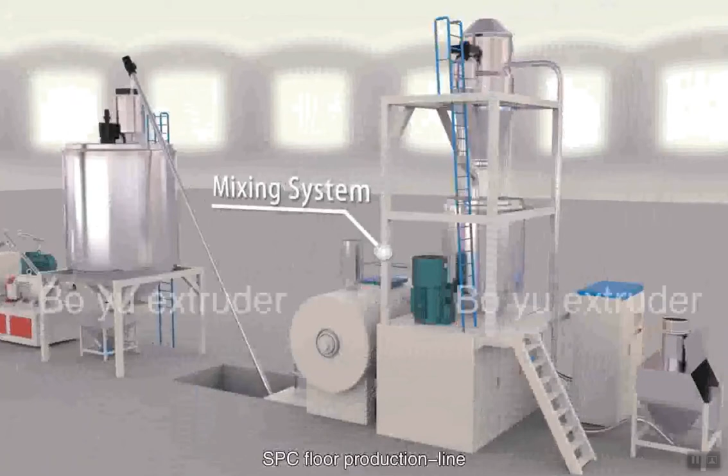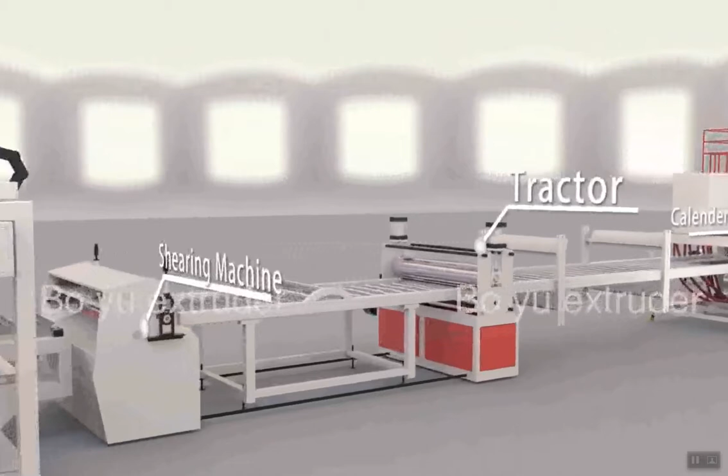This is an introduction to the SPC floor production line. It consists of 6 parts: mixing system, extrusion system, calendering system, tractor, shearing machine, and automatic plating machine.

Mixing system. The first step is feeding. The raw materials are put into the mixer in proportion to the formula. Other processing aids need to be measured separately and mixed together, then put into the feeding station and sucked into a feeding tank by vacuum feeder.

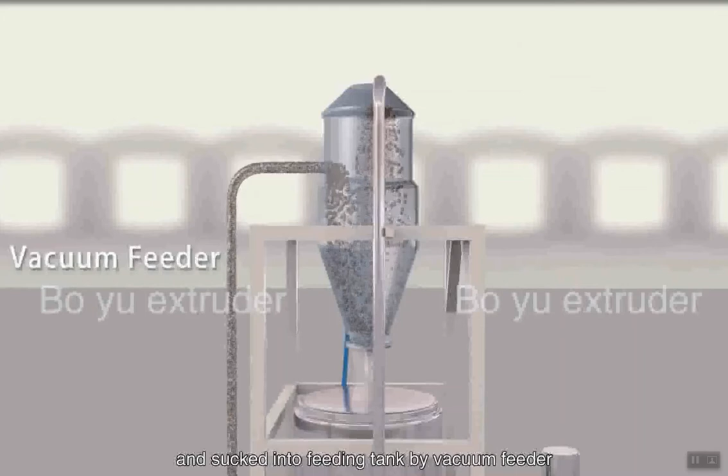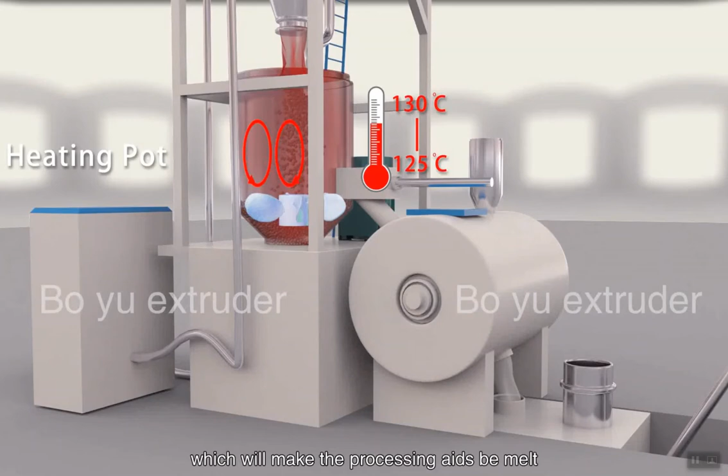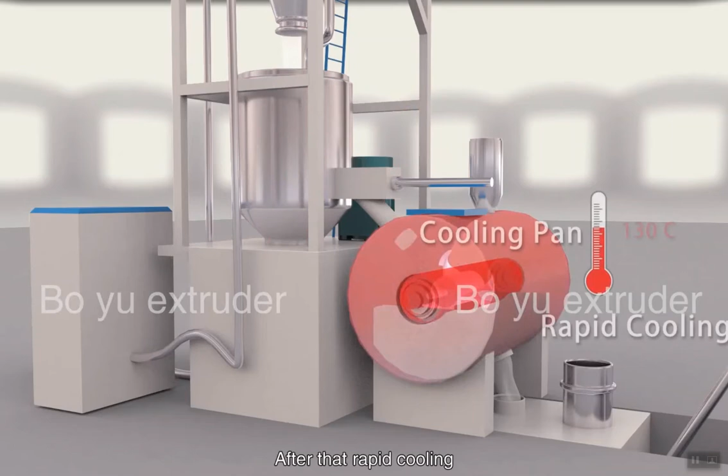Subsequently, the principle of heating up by friction is used to mix the raw materials at high speed and raise the temperature from 125 degrees centigrade to 130 degrees centigrade, which will make the processing aids be melted and the water vapor be removed from the raw materials, so that the raw materials can meet the requirements of use. After that, rapid cooling is carried out to prevent any occurrence of problems, such as plasticizing in advance or volatilization decomposition of processing aids.

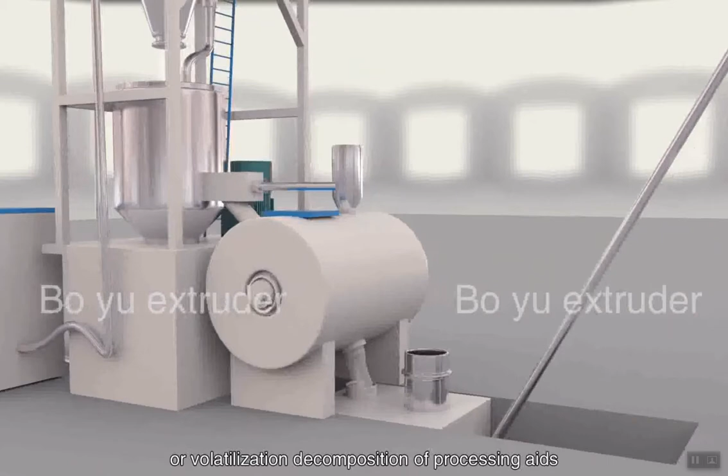The materials discharged from the cooling pan are fed into the screw barrel by screw feeder at a constant speed, while double screw feeding can avoid the influence of the start-stop of the feeder on the stability of the feeding process. Extrusion system: after entering the screw barrel, the materials are plasticized by heated rolling.

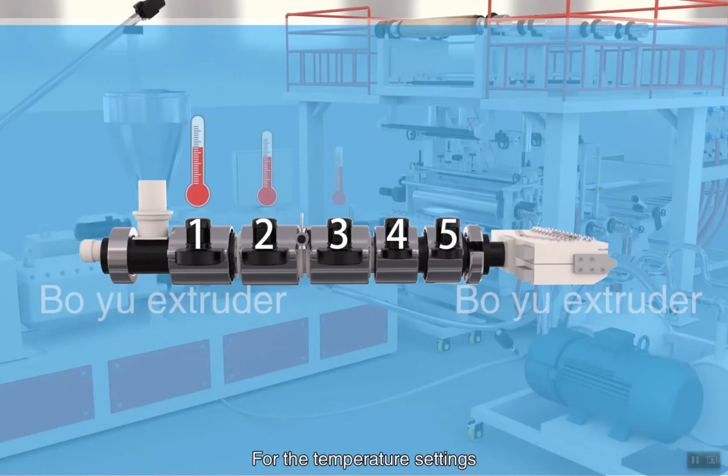In this process, temperature control is the most critical link. The temperature control of Boyu SPC floor production line is divided into 5 zones. For the temperature settings, it is gradually increased from Zone 1 with initial temperature of 190 degrees centigrade to 220 degrees centigrade at Zone 5.

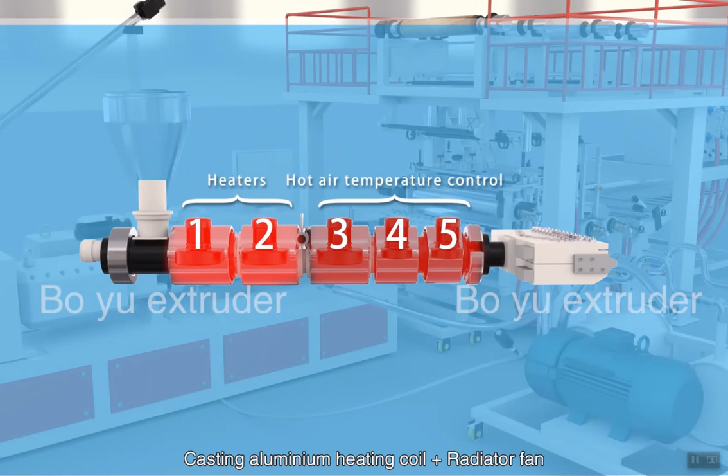For hardware, Zone 1 and Zone 2 adopt heating coils. In the other heating zones, cast aluminum heating coil metals plus radiator fan are used to control the temperature. For software, a temperature control module plus relay board is used to complete the heating or heat dissipation output, which combines with high precision thermocouple for temperature measurement, so as to realize precise control of the temperature.

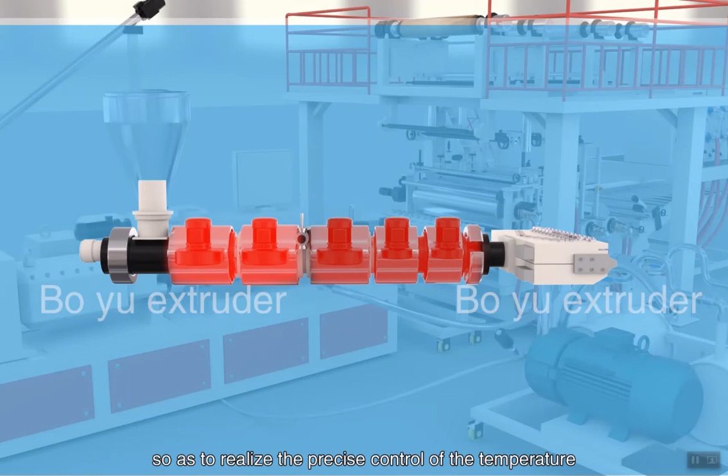After the completion of plasticizing, the materials will be extruded and then pushed to the tooling by strong back pressure. The tooling size is determined by product specifications.

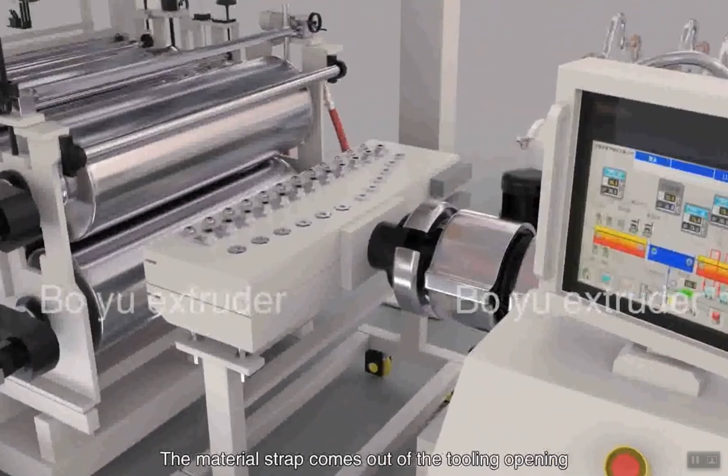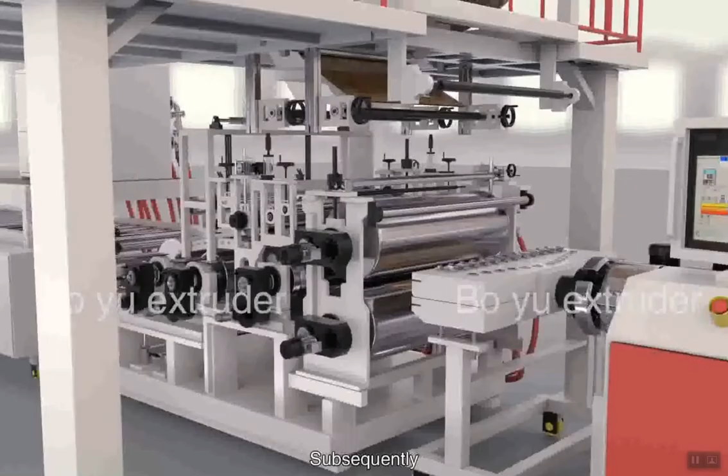Calendering system: the material strip comes out of the tooling opening and then into the 5-roller calendering system. Firstly, it is rolled by number 1 roller and number 2 roller to ensure that the thickness is uniform and up to standard. Subsequently, the wear-resistant coating and color film are closely fitted by the temperature of the material strip itself and the heating of number 3 roller.

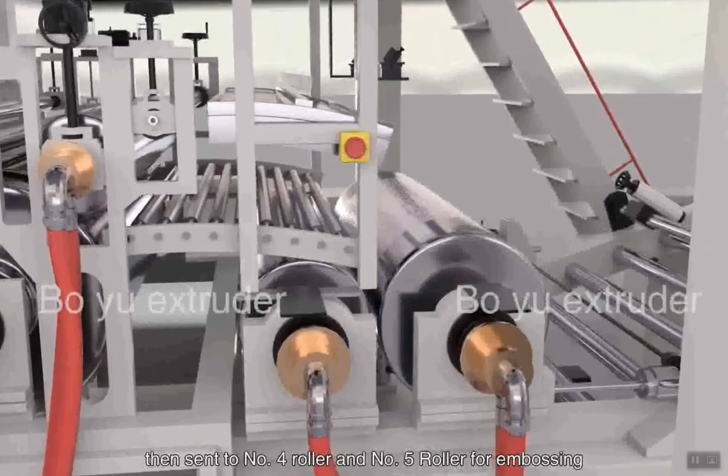Then, it is sent to number 4 roller and number 5 roller for embossing. Number 4 roller is made of silicone rubber, which will make the embossing texture clear by using the method of cold pressing. The stability of color film and wetting is key to the rate of final products.

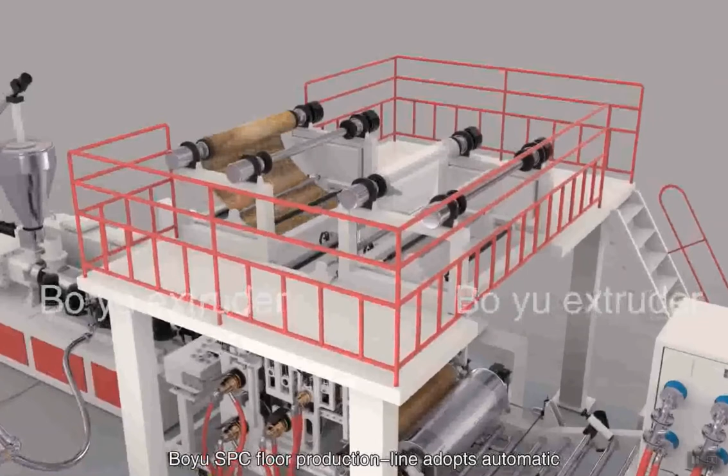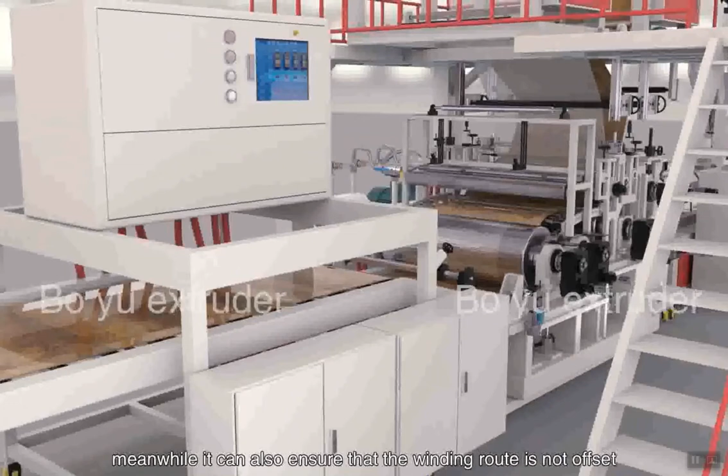Boyu SPC floor production line adopts an automatic constant tension control system for output, so as to ensure the stability of color film and wetting. Meanwhile, it can also ensure that the winding route is not offset by using the automatic correction program. The synchronous registration system combines a high-speed operation module with an emerging alignment system to make the surface embossing coincide with the color film pattern, so as to achieve the precise alignment effect of synchronous registration.

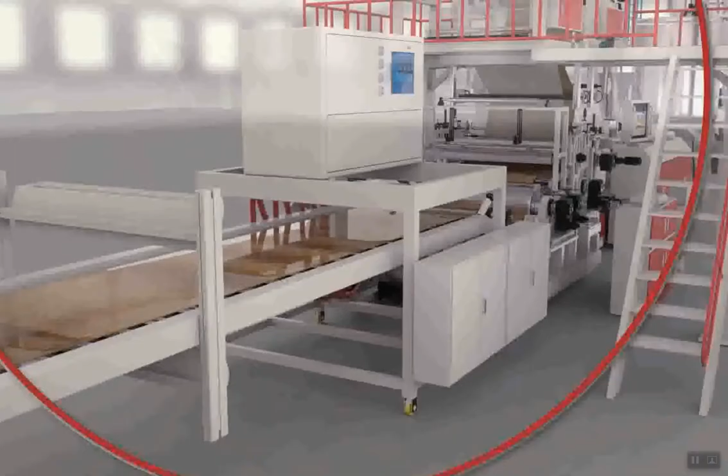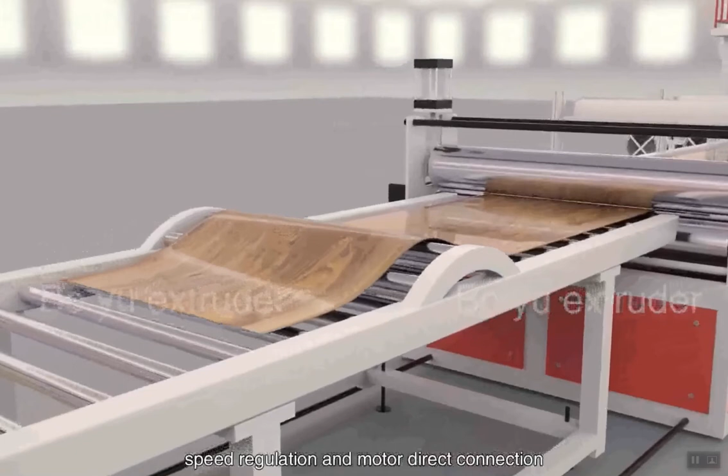Tractor: the tractor of the Boyu SPC floor production line adopts the structure of frequency conversion, speed regulation, and motor direct connection, which can match the production line speed perfectly.

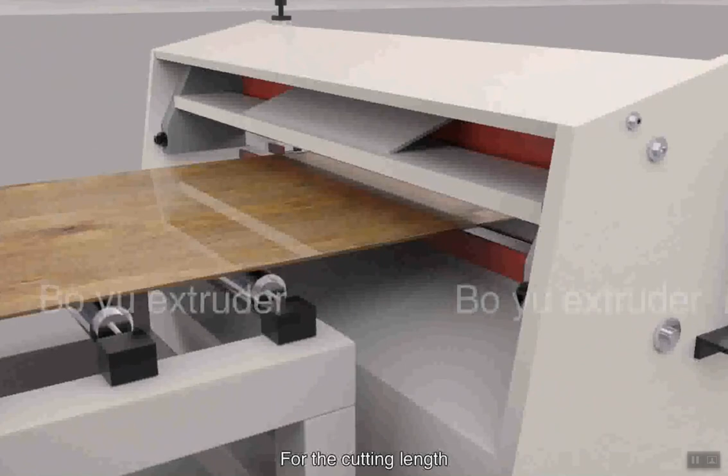Shearing machine: the material strip is transported to the shearing machine by the tractor for cross-cutting. For the cutting length, the signal is transmitted by a photoelectric switch, so that the response can be sensitive and the length can be accurate.

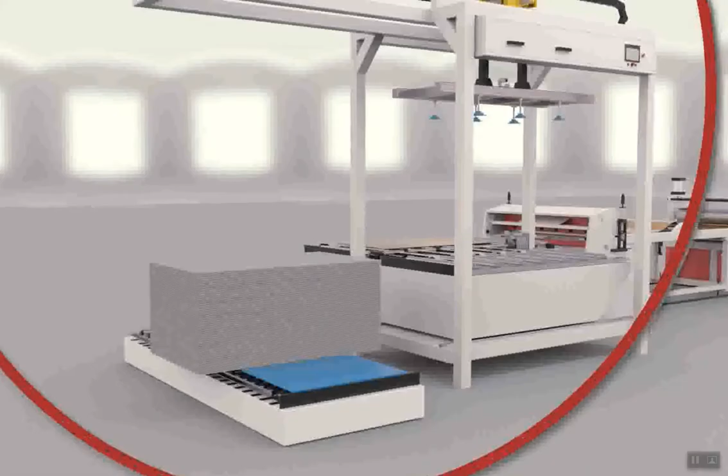Automatic palletizing machine: the finished material strip, after being cut, will be stacked by the automatic palletizing machine.